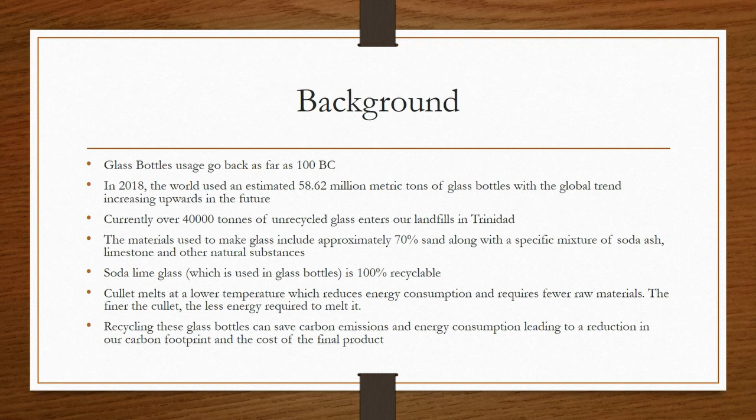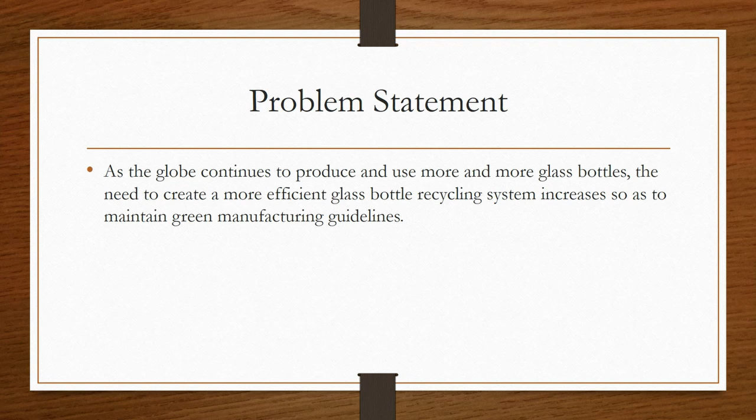Recycling these glass bottles can save carbon emissions and energy consumption, leading to a reduction in our carbon footprint and the cost of the final product. The problem that we face is that as the globe continues to produce and use more and more glass bottles, the need to create a more efficient glass bottle recycling system increases so as to maintain green manufacturing guidelines.

Our aim for this project is to design a glass recycling machine that will separate, wash, and pulverize glass bottles, giving fine glass cullets as the final product.

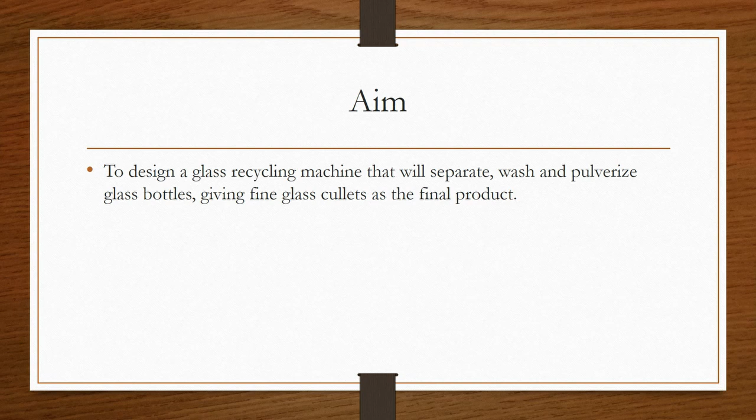The objectives that we hope to achieve in this project are as follows: to transcribe a literature and patent review to aid in the conceptualization of the design, to conduct research and surveys to determine the client/user requirements, to undertake the design process to generate 3 designs, rate them, and select the best one to further develop, to perform the analytically based calculations and simulations on the proposed machine, to construct a prototype based on function to mimic real-world action.

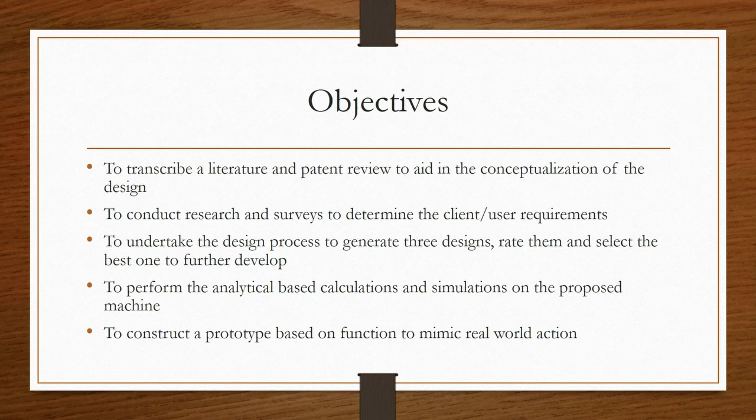To gain a better understanding of the glass bottle, a literature review was conducted. It was found that the first patent of the modern English bottle was granted to John Colnett on the 10th of April 1661. Typically, the ingredients for making glass are soda ash (disodium carbonate), sand (silicon dioxide), and limestone (calcium carbonate). These are subsequently mixed and placed in a furnace to melt. The resulting molten mixture is liquid glass.

The main process for glass bottle manufacture is blow molding. Blow molding is a process that converts a hollow parison or preform into a shaped container by deforming it under air pressure against a mold. Blow molding processes involve shaping the material while it is in a molten state, but the melt has cooled enough so that the viscosity is still quite high.

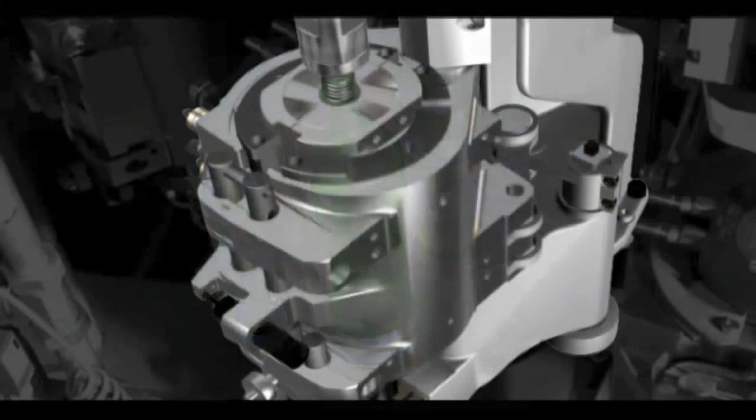A glass cullet is produced from crushing waste glass collected in municipal and industrial waste streams to a uniform size. Using cullets in glass making saves energy and reduces costs. It was also found that there is a need for color-based sensors in modern glass cullet producing machines so that manufacturing companies can more efficiently produce their products.

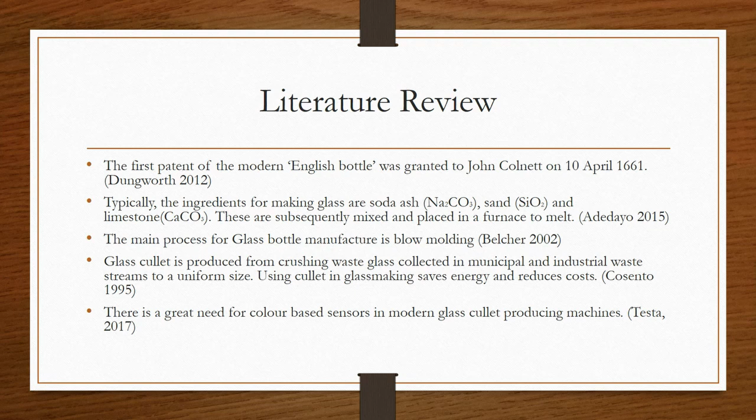5 patents were reviewed to gain inspiration for our designs. Patent 1: This device comprises of a spinning blade and cowl, a disposal receptacle, and an internal screen.

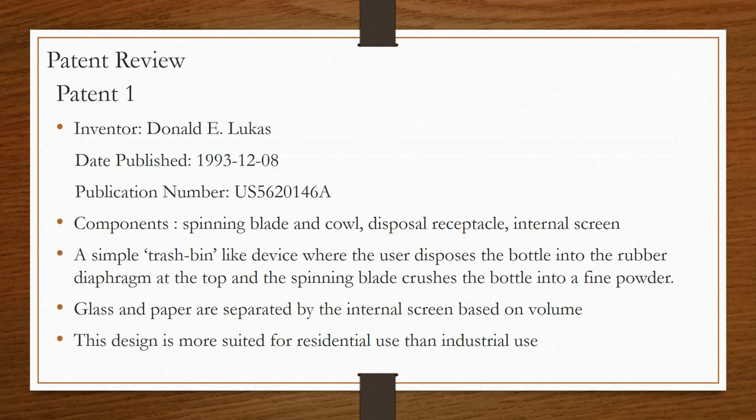It is a simple trash bin-like device where the user disposes the bottle into the rubber diaphragm at the top, and the spinning blade crushes the bottle into a fine powder. Glass and paper are separated by the internal screen based on volume to allow for easy green disposal. This device, however, is more suited for residential use than actual industrial use.

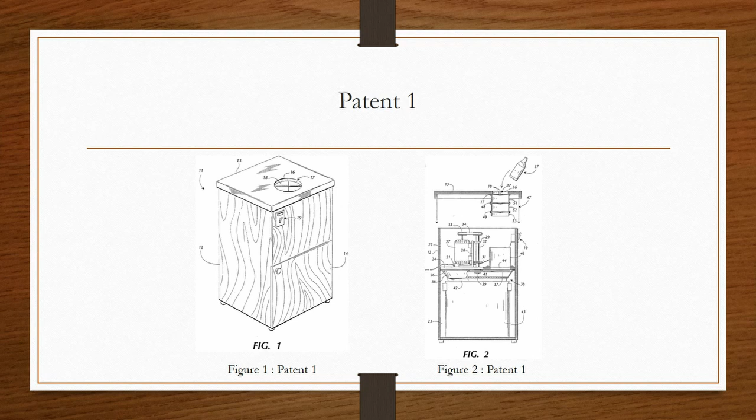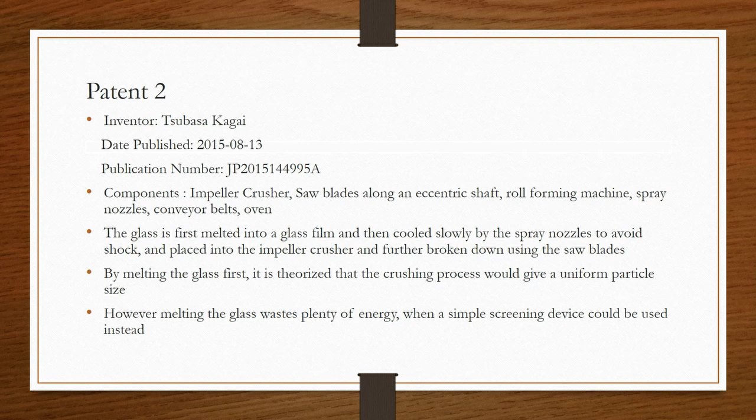Patent 2: This device comprises of an impeller crusher, saw blades along an eccentric shaft, roll forming machine, spray nozzle, conveyor belts, and an oven. The glass is first melted into a glass film and then slowly cooled by the spray nozzles to avoid shock.

It is then placed onto the impeller crusher and further broken down using saw blades. By melting the glass first, it is theorized that the crushing process would give a more uniform particle size. However, melting glass wastes plenty of energy when a simple screening device could have been used instead.

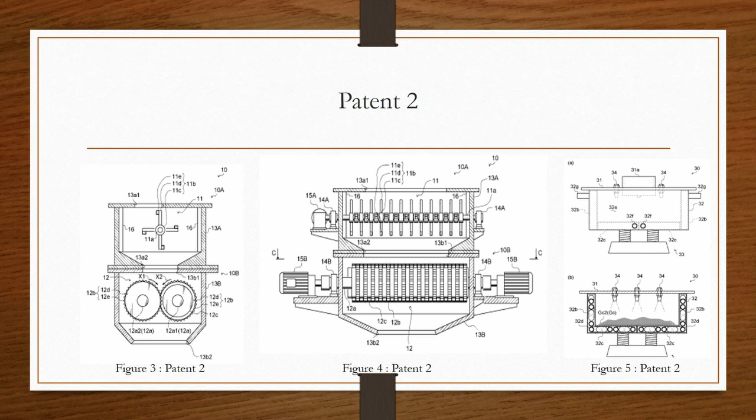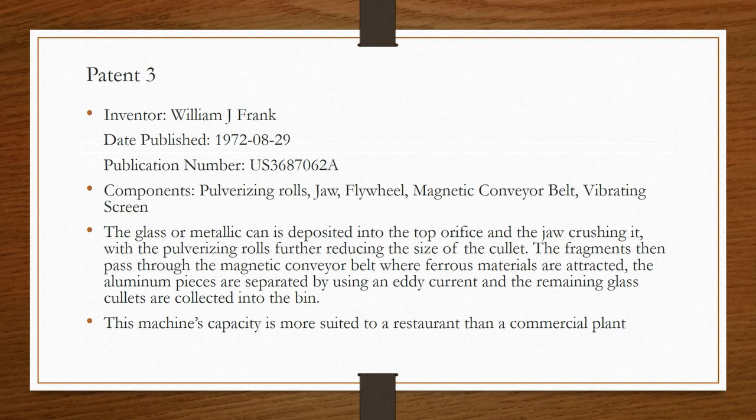Patent 3. This device comprises pulverizing rolls, a jaw, flywheels, magnetic conveyor belts, and a vibrating screen. The glass or metallic can is disposed onto the top orifice and the jaw crushes it with the pulverizing rolls, further reducing the size of the cullet.

These fragments then pass through the magnetic conveyor belt where ferrous materials are attracted to it. The aluminum pieces are then separated by an eddy current. Since aluminum is not magnetic, the remaining glass cullets are then collected into the bin. This machine's capacity, however, like the first, is more suited to a restaurant than a commercial plant.

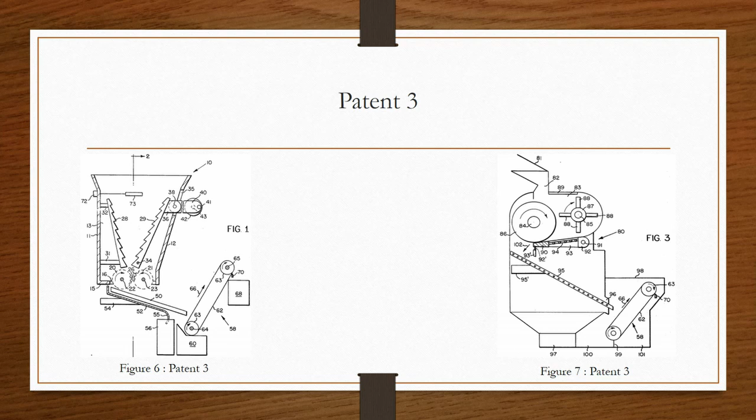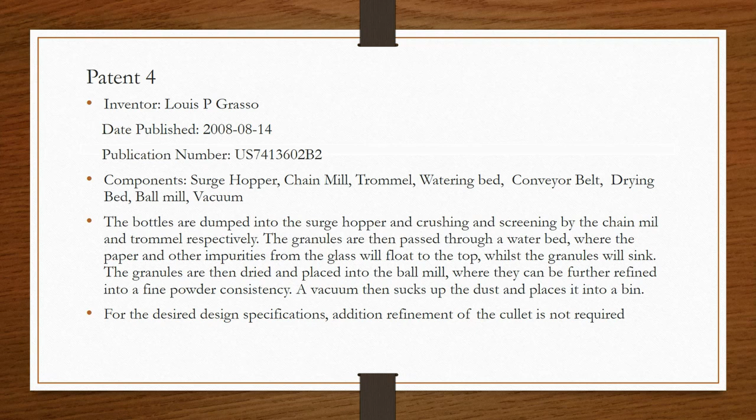Patent 4. This machine comprises a surge hopper, a chain mill, a trommel, watering beds, conveyor belts, a drying bed, a ball mill, and a vacuum. The bottles are dumped into the surge hopper, crushing it and screening by the chain mill and trommel respectively.

The granules are then passed through a waterbed where the paper and other impurities from the glass will simply float to the top, whilst the heavy granules will sink to the bottom. The granules are then dried and placed into the ball mill where they can be further refined into a fine powder consistency. A vacuum then sucks up the dust and places it into the bin.

For the design specifications, additional refinement of the cullet is not required.

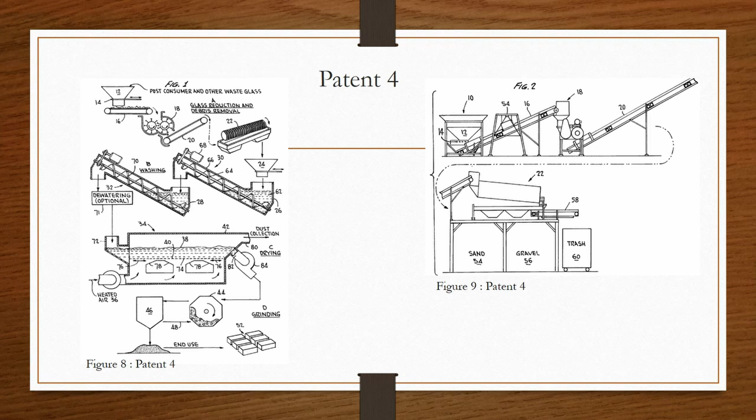Patent 5. This invention comprises an ozonation bed, a trommel, flexible impactors, a saw blade pulverizer, an optical sensor, an eddy current separator, a blower, and magnets.

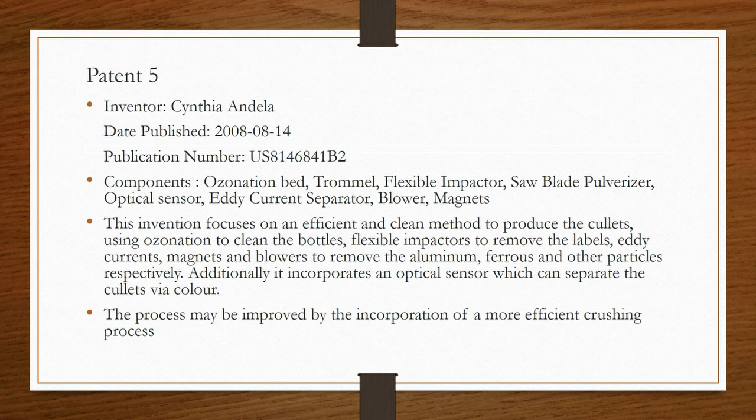The invention also uses flexible impactors to remove the labels, eddy currents, magnets, and blowers to remove the aluminum, ferrous, and other particles respectively. Additionally, it incorporates an optical sensor which can separate the cullets via color.

This process may be improved by the incorporation of a more efficient crushing process, as saw blade pulverizers are not the most efficient in terms of crushing.

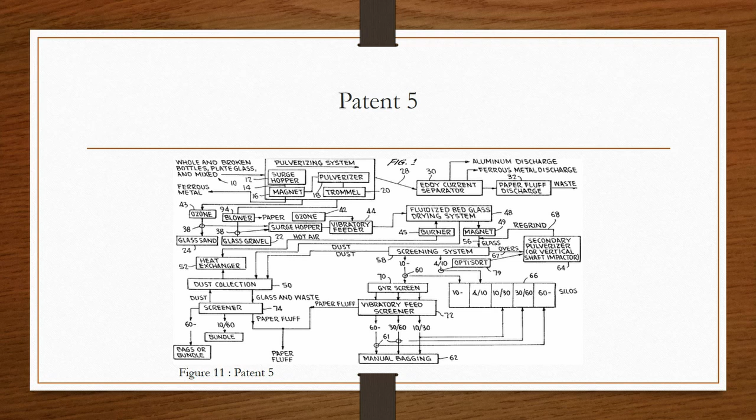Now to introduce a special guest who will discuss his client and user requirements.

Hi, I'm Ronald Roach, the CEO of the Trinidad and Tobago Solid Waste Management Company Limited. In terms of our client requirements for a glass pulverizer, we're looking for something that is energy efficient, that has low carbon emissions.

That has a fine particle size, that is low in maintenance, especially maintenance related to the replacement of the blades, that has a high capacity, that provides a high degree of automation, and of course that is inexpensive to manufacture.

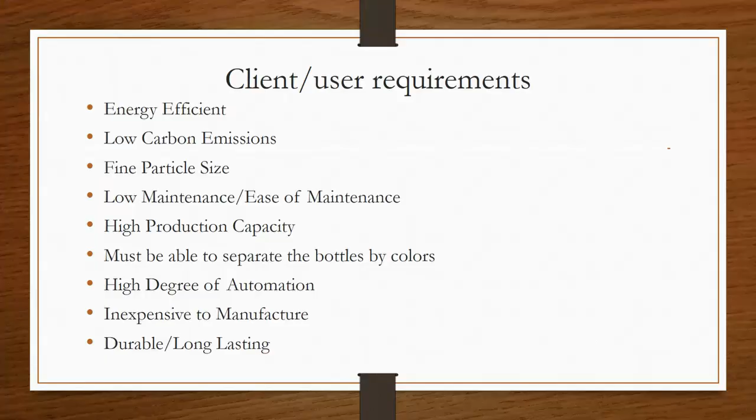To meet our clients' requirements, we have created design specifications to ensure that the machine design complies with the criteria set out. Firstly, the machine must not have limitations on the size of glass bottles it's able to crush.

The machine must also have a production capacity of at least 10 metric tons of bottles a day. Since the machine is being designed for a small recycling company, it should not exceed 5,000 square feet.

The machine must include a washing component to remove impurities and bottle labels before being crushed. A function must be included to separate the bottles by color.

For safety purposes, the machine must be equipped with safeguards and an emergency stopping system. Standard parts must be used to allow for easy inspection and maintenance. The machine must have good stability and support to minimize vibrations.

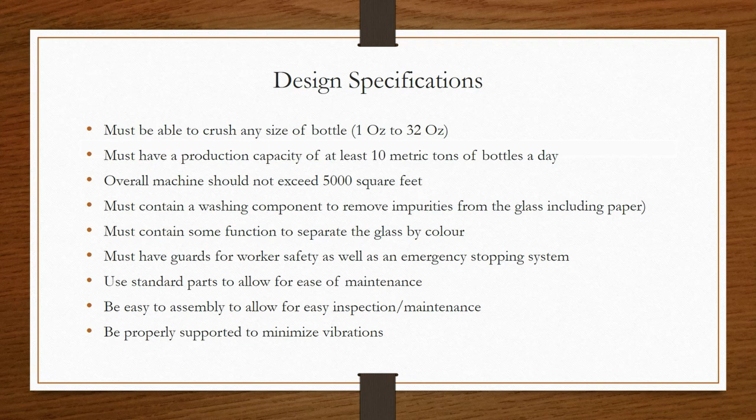A black box shows the functional decomposition of a machine by representing its inputs and outputs in schematic form. We can see here that glass bottles, an acidic solution, and electrical energy are inputted to the machine.

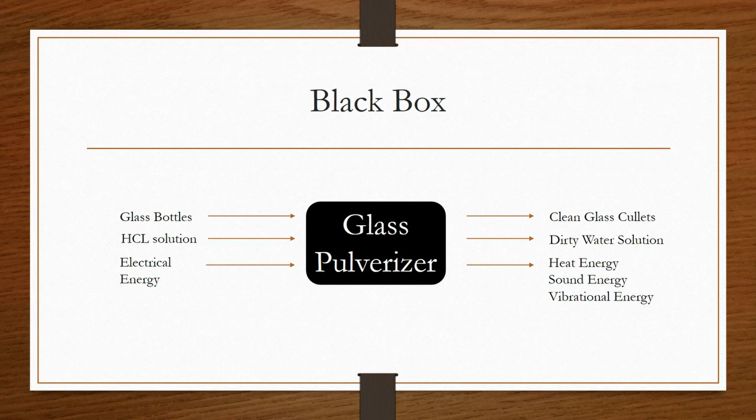After the machine performs its functions, it outputs clean glass cullets, a dirty water solution, and heat, sound, and vibrational energy. A transparent box shows the subfunctions of the machine to be designed.

While the main function of the machine is to pulverize glass, it must also convey, wash, and dry glass bottles, along with separating particles based on size and color. Here we see the inputs and outputs of the subfunctions.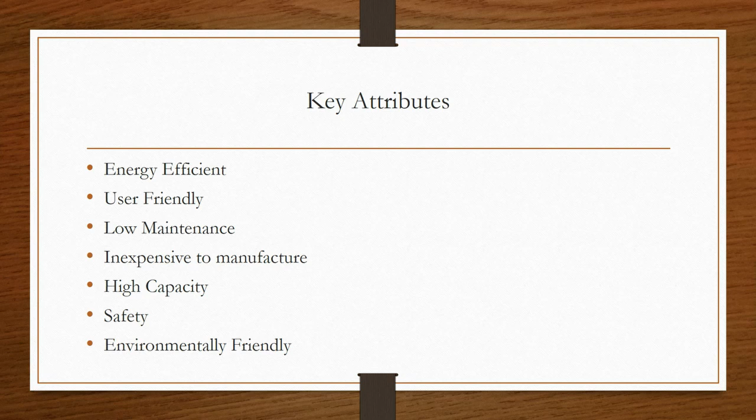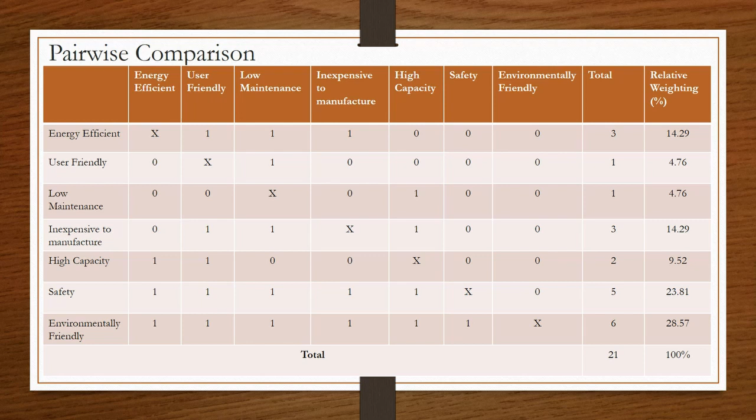From this table we can see the key attributes mentioned before and the metrics to give us a better understanding of each attribute. In this table each attribute is compared to one another. Looking at each row, one would see that environmentally friendly would be most important in building this glass pulverizer compared to the other attributes, due to the fact that this whole operation is based on recycling and saving the environment.

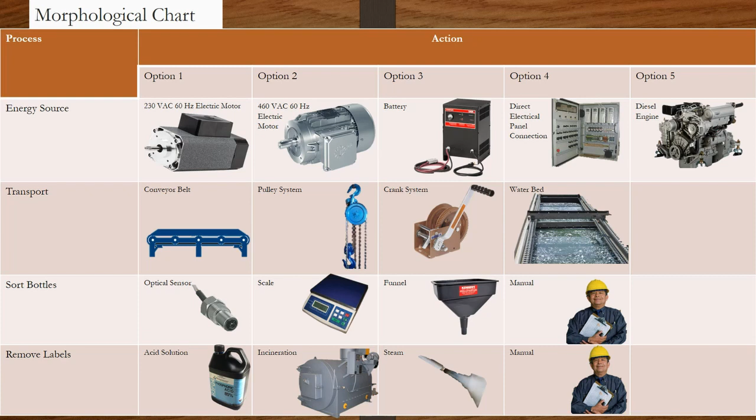Here we have a morphological chart. This chart deals with each process associated with the pulverizer and the options available in carrying out each process.

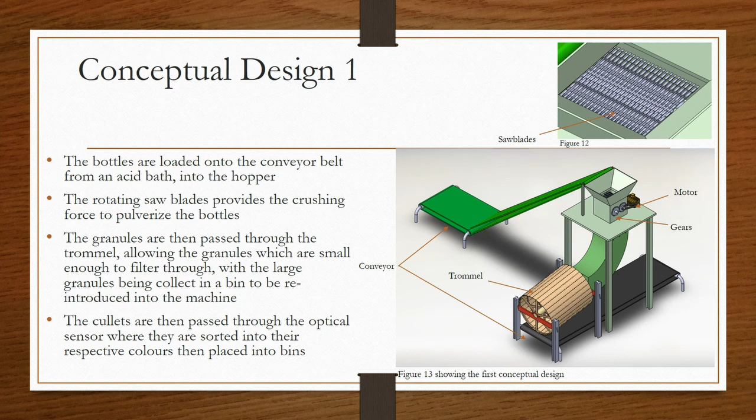Conceptual Design 1. In this design, the bottles are placed onto the conveyor belt via an acid bath into the hopper. It is then crushed by the rotating saw blades, which pulverizes the bottles. The granules are then passed through the trommel, allowing the granules which are small enough to filter through, with the large granules being collected in a bin to be reintroduced into the machine. The cullets then pass through an optical sensor where they are sorted by color and placed into bins.

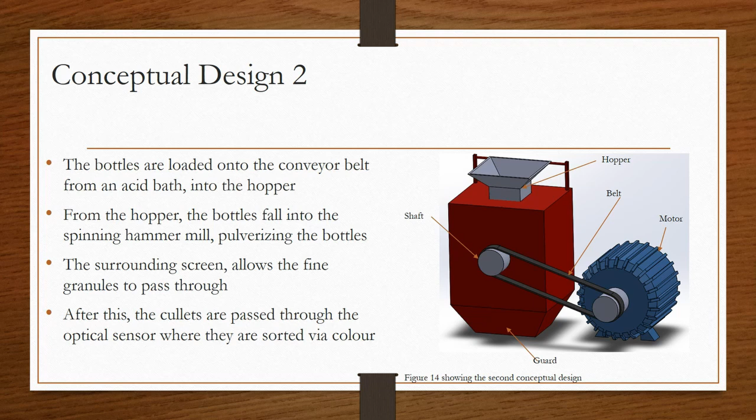Conceptual design 2. The bottles are loaded onto the conveyor belt from an acid bath into the hopper. From this, the bottles fall into the spinning hammer mill, which pulverizes the bottles. The surrounding screen allows the fine granules to pass through. After this, the cullets are passed through the optical sensor where they are sorted via color.

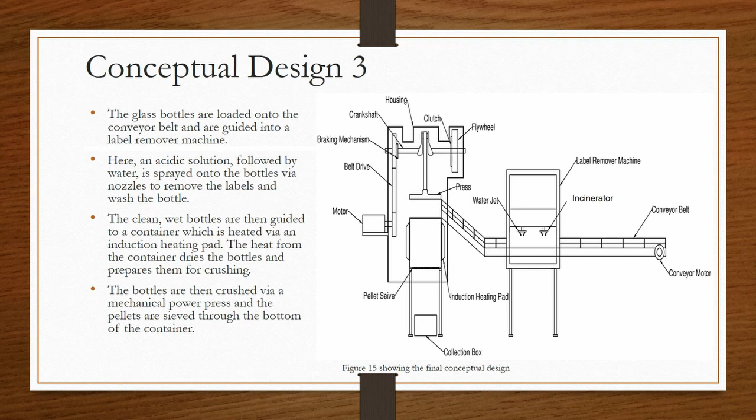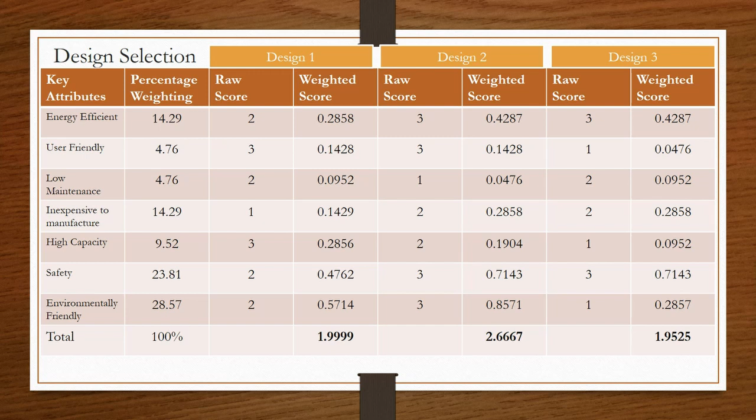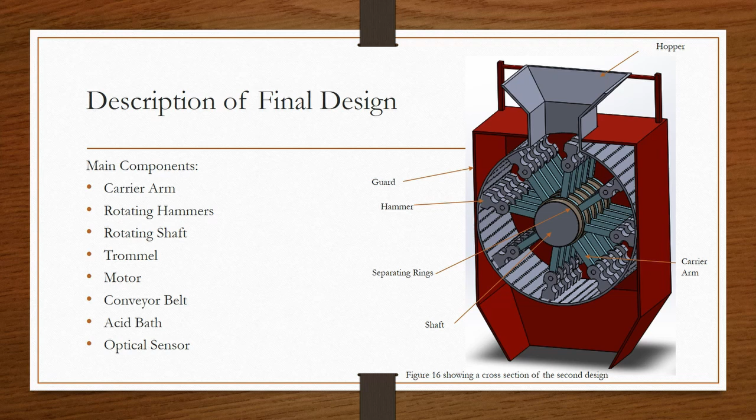Acid bath: a large container containing muriatic acid. Studies have shown that muriatic acid is fully capable of dissolving paper on its own, as well as removing any contaminants from the bottle. The bottle passes through the bath, which is the first step in the cullet making process. The bottles spend a predetermined amount of time to allow all the paper and other contaminants to be dissolved from the glass. The glass is then sent to be crushed.

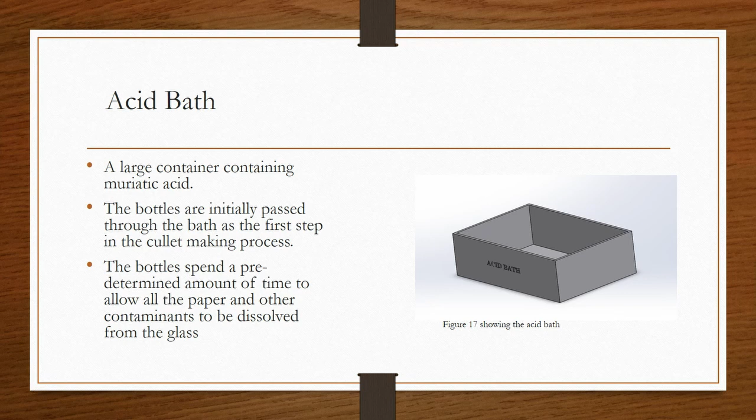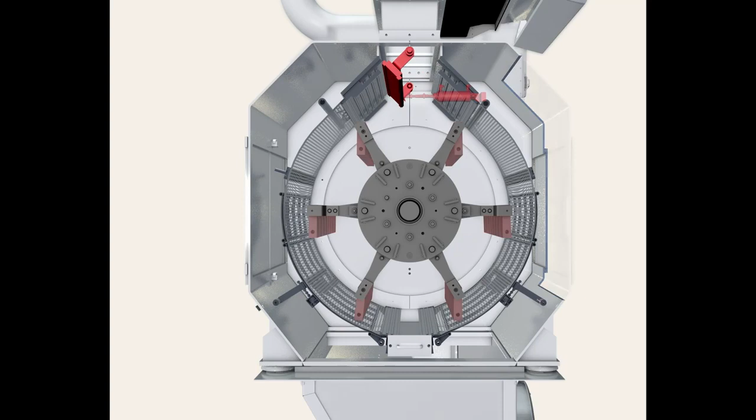Crushing mechanism. The crushing mechanism is attached to the shaft, where it is secured at the ends by bearings. Comprised of the carrier arm and rotating hammers, which are connected via pins to allow the hammers to rotate freely. The initial hammer would impact the bottle with enough force, causing it to break. The rotation of the arm allows for the already broken pieces to be continuously smashed.

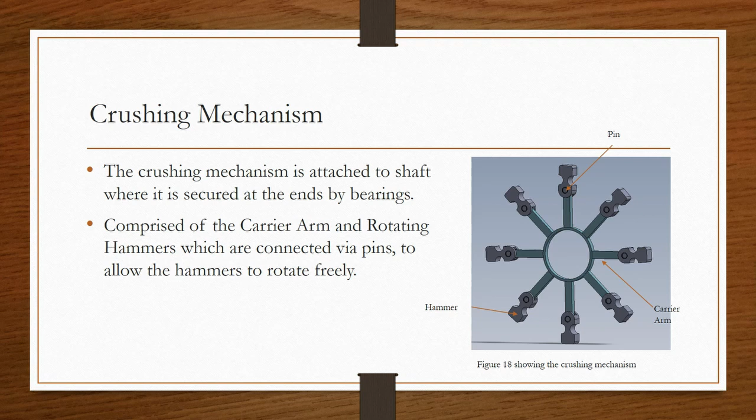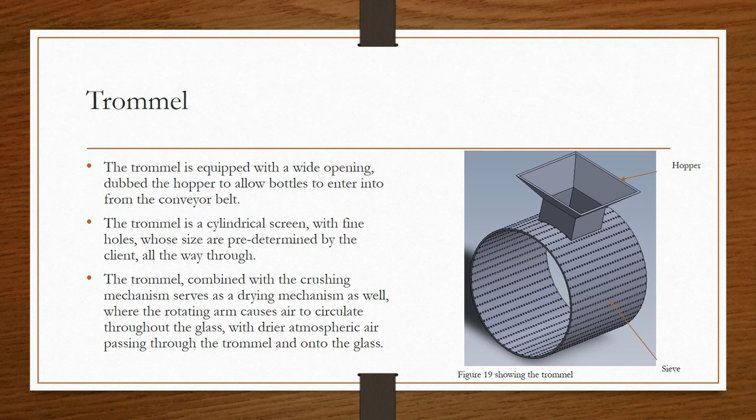Trommel: the trommel is equipped with a wide opening, dubbed the hopper, to allow bottles to enter from the conveyor belt. The trommel is a cylindrical screen with fine holes whose size is predetermined by the client all the way through. The trommel, combined with the crushing mechanism, serves as a drying mechanism as well, where the rotating arm causes air to circulate throughout the glass, with drier atmospheric air passing through the trommel and onto the glass. After being pulverized, the glass granules will simply fall through the screen and onto another conveyor belt for further sorting.

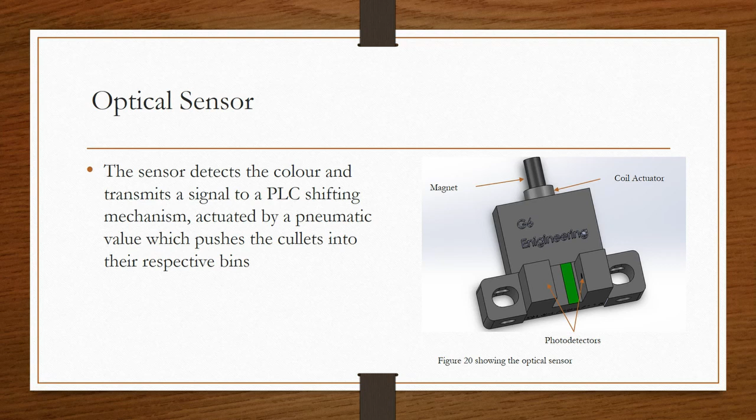Optical sensor: optical sensors send a light signal onto the object. The object then reflects the light incident to the sensor. The sensor then converts the light signal into an electrical signal, detects the color, and transmits a signal to a PLC shifting mechanism, actuated by a pneumatic valve, which pushes the cullets into their respective bins.